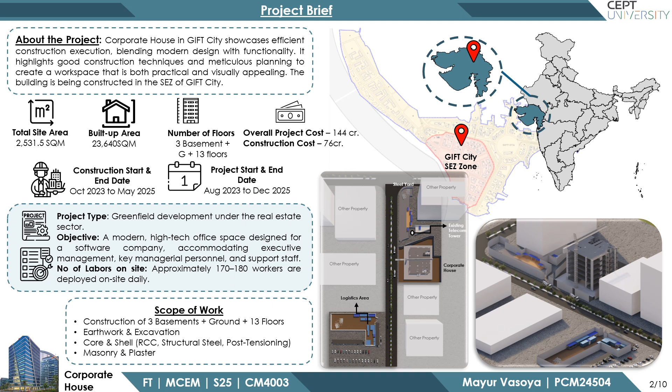Construction started in October 2023 and is expected to conclude by May 2025, with a total construction cost of 76 crore. Approximately 170 to 180 laborers are deployed on the site daily.

In this phase, various elements were considered, ranging from obtaining the legal approvals to development planning and execution. Site mobilization was a crucial part of the early stage strategy, supported by a safety first approach, including the use of PPE kits, barricades, safety nets, and regular inspection. I also included a cost breakdown to show early financial planning and points to inspect during concreting, such as checking reinforcement, binding, shuttering quality, concrete workability, and compaction.

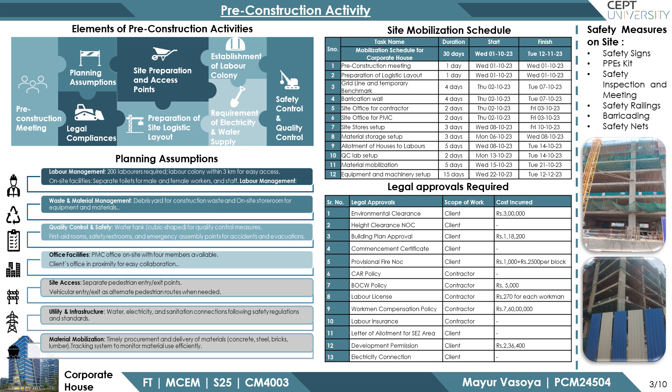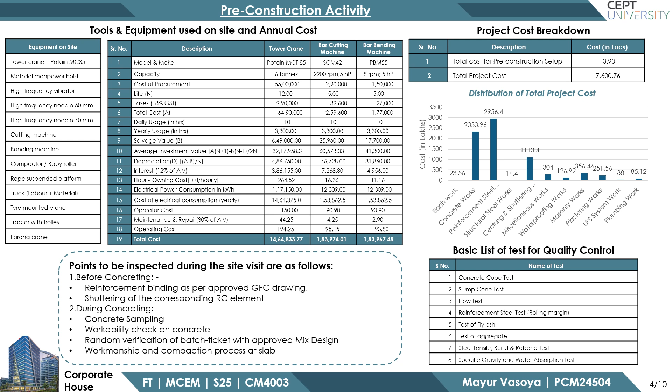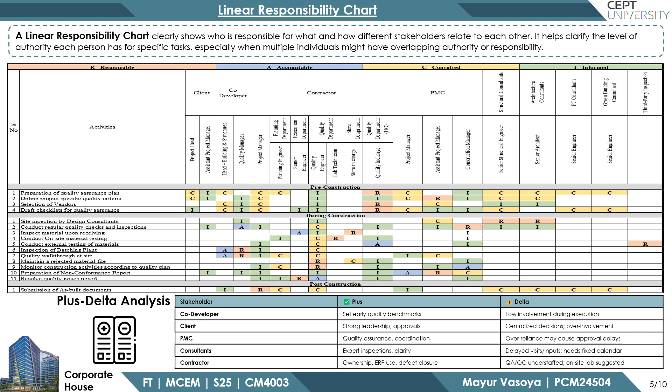Here I document the key tools and their associated annual cost. I also compiled a list of the basic tests used for quality control, ensuring that work met expected standards throughout the build process. And I conducted the plus delta analysis to identify strengths and areas for improvement. The linear responsibility chart was particularly useful in clarifying who was responsible, accountable, consulted, and informed across the various project activities, streamlining communication and accountability.

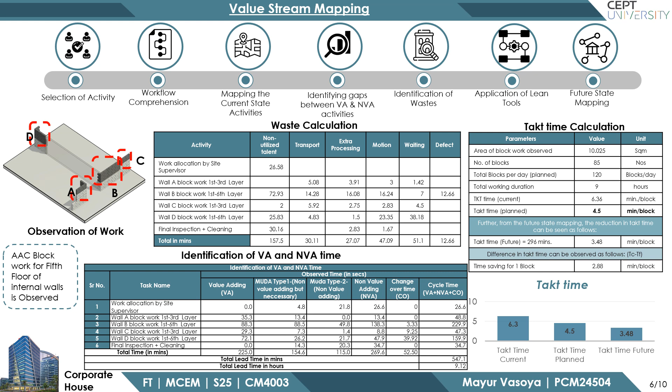This project strongly benefited from the application of lean construction principles, and I conducted value stream mapping to identify the flow of activities, separating value added and non-value added components. By mapping current and future state activities, I was able to pinpoint inefficiencies and suggest leaner processes. Waste calculation helped uncover unnecessary material handling, waiting times, and idle labor. And the takt time was calculated to align workflow with customer demand.

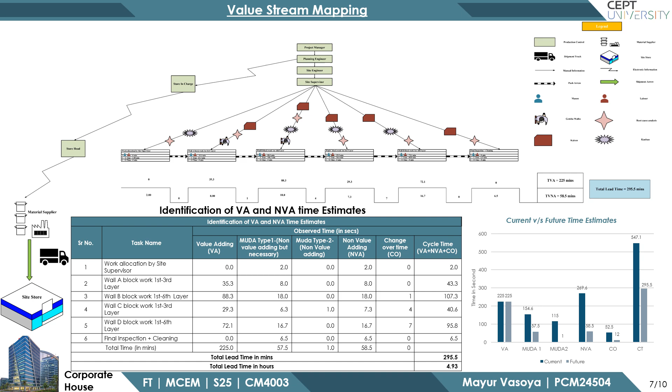And I selected AAC block work on the fifth floor for in-depth time observation. This helped identify the inefficiency and revealed that a significant percentage of time was spent on non-value adding activities. Using a structured work sampling approach, I observed the tasks at 30 minute intervals over two full working days, covering activities like deshuttering, block work, and hacking. This method offered real-time insight into how labor was utilized and productive versus unproductive time.

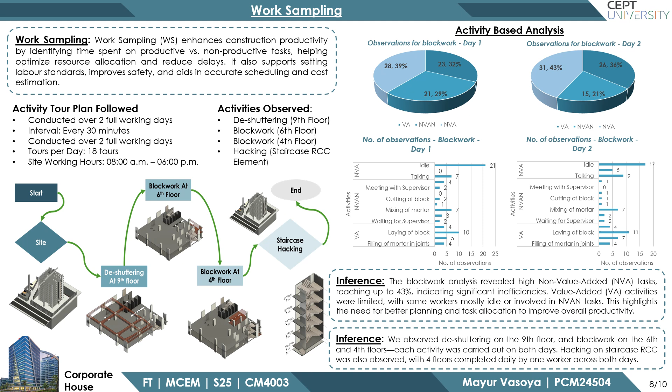And my observation revealed several inefficiencies. Deshuttering efficiency slightly improved from 64% to 65%, indicating some gains with better task focus. The hacking activities improved from 34% to 36%, showing that with better planning, even highly physical tasks can be optimized. The blockwork analysis, however, saw high non-value added time of up to 43%, which indicated room for significant improvement in workflow and labor distribution.

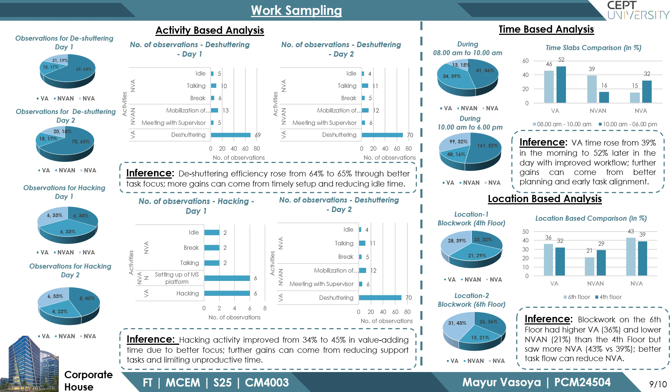And the time-based finding: the VA time increased during the day from 39% in the morning to 52% later, showing the importance of morning planning. The location-based analysis revealed better VA performance on the sixth floor as compared to the fourth floor. This indicated that better task sequencing and flow could reduce delays and unnecessary work.